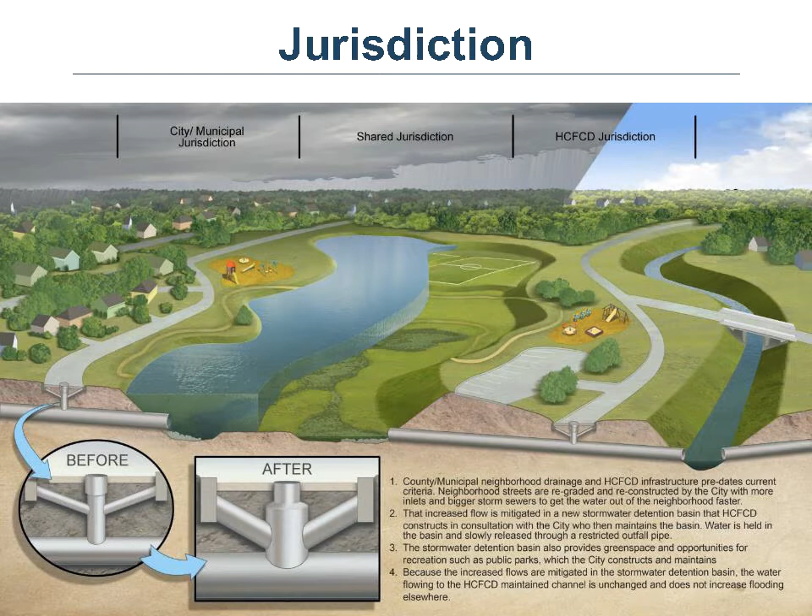Now, where flood control doesn't and can't build recreation, we routinely work with sponsors such as Harris County Precinct 3 or MUD or the City of Houston if we happen to be in that area, and to say, hey, look, we're going to build this green space for a detention basin, but 9 times out of 10, most of the year, it's going to be dry. Do you want to do something? Maybe put a ballpark in the bottom or put some trails around the top of it. And so that's where we get this idea of shared jurisdiction.

So that brings us to the projects that we developed through what I like to call our summer roadshow last year. One of those meetings was actually right here in this facility. I hope that some of y'all had the opportunity to join us in that. And what came out of that was a list of 237 projects that we included on our $2.5 billion bond election. The promise to the voters is that we would take that $2.5 billion and do our best to leverage federal opportunities to build as much as $5 billion worth of projects.

But what I'd like to point out, and this is where I like to indicate some of the proof in the pudding, why we're out here talking with y'all tonight, is that you'll see that 38 of those projects out of 237 were a direct result of the community input. These were ideas from the community that said, we think y'all should look at this, and we said, you're right, we should. And so we added that to the list.

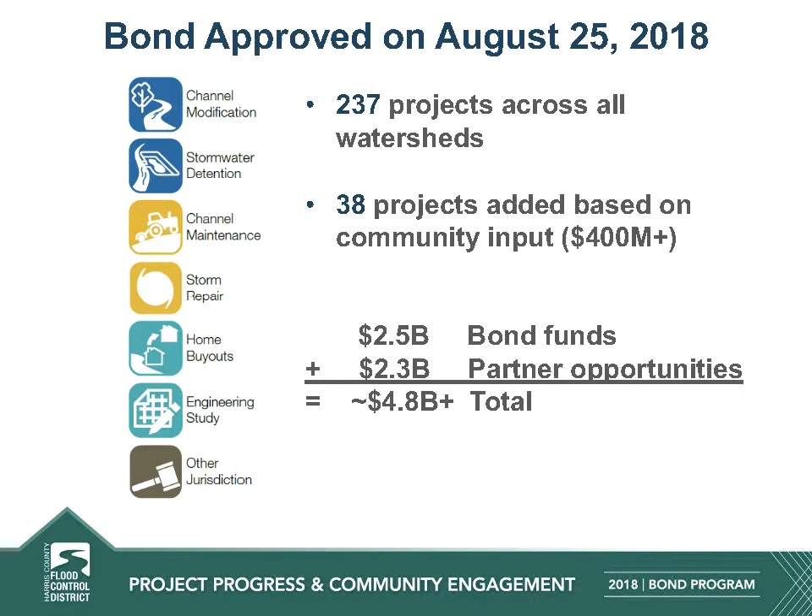I'm not going to go into much detail. I've already exposed my staff to an hour and a half's dissertation on what it takes to go through these programs. Instead, you guys look really nice. We'll move on to the next slide right after I at least highlight who those federal agencies are. These are the ones that we work with to try and access as much federal funding as we can. So over on the left is, of course, Harris County. Your property taxes pay for our $120 million a year appropriation.

But then we have our great partners with the United States Army Corps of Engineers, some of which are here tonight. Again, that was one of the original purposes that Flood Control District was formed, and so we work with them, and right now our partners on Hunting Bayou, Clear Creek, Brays Bayou, and White Oak Bayou federal programs. Those projects have been in the works now for really decades.

Then we move on to the United States Department of Agriculture. Who knew? The NRCS. They're one of the primary funding partners of ours for making repairs to our channels after a disaster. After Hurricane Harvey, they are behind $80 million worth of repairs that we're making right now all across the county to our infrastructure. Yes, it's depressing to think that 2 years after the fact, we're just now getting those repair projects out, but that's an indicator of the pace at which federal funds have been known to flow.

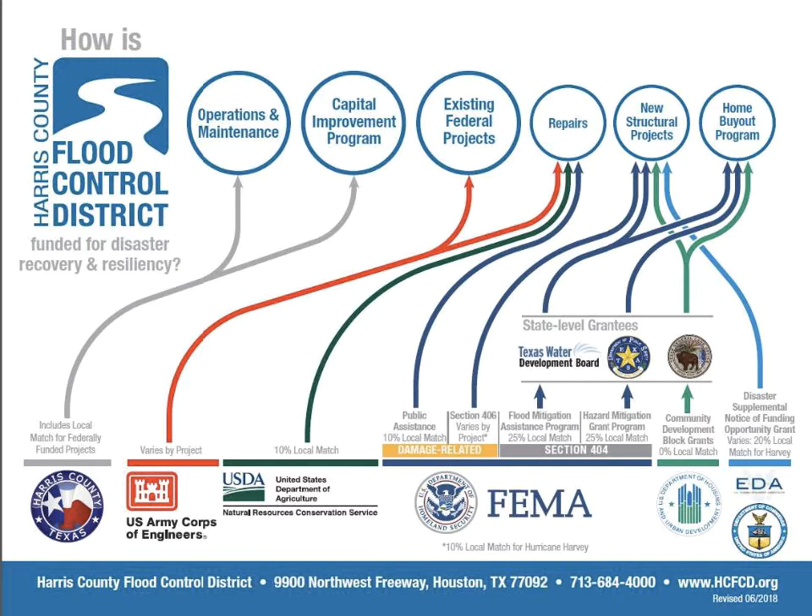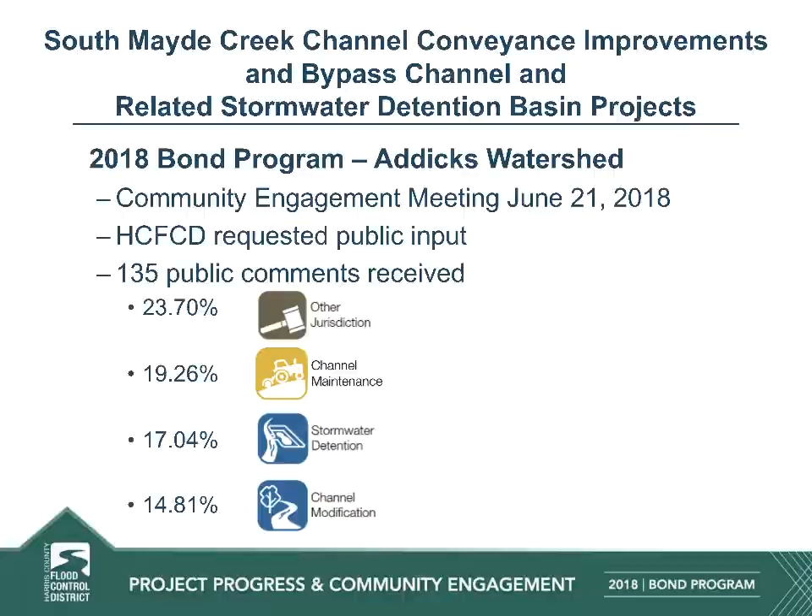What's important to us, of course, is our original mission to build flood damage reduction projects that work with appropriate regard for community and natural values. So with that, I'd like to turn the microphone over to our next presenter, and it's Jonathan St. Romain. Jonathan is a project manager at Harris County Flood Control District, and he'll be talking about these projects that we've been looking at. Thanks for your time.

Thank you, Alan. As Alan mentioned, my name is Jonathan St. Romain. I'm the flood control project manager for these two projects we're going to go over tonight. And so we'll go over the full outline of our first project and then head into the second one. So the first project we're going to go through, it's kind of a mouthful because it's got a lot going on. It has two main components to it, channel improvements and bypass channel for South Mayde Creek.

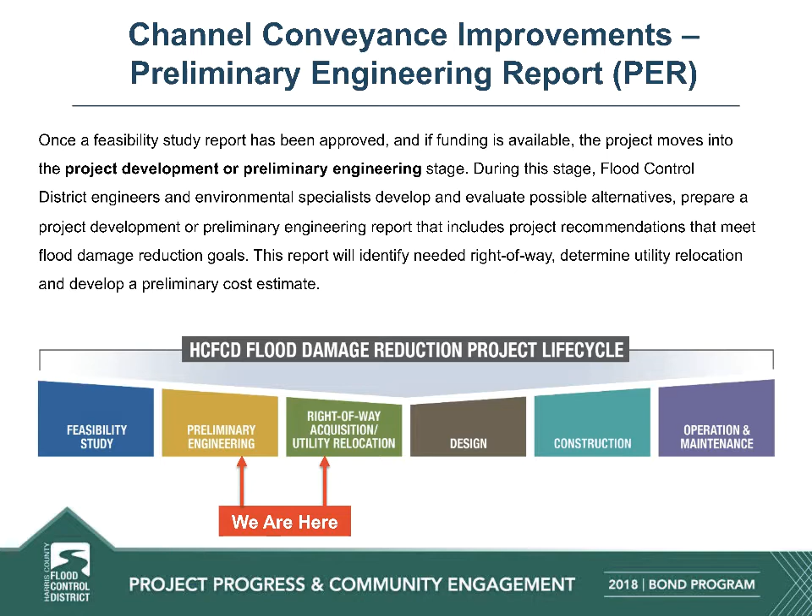So PER, what is a PER? Why do we have to do this? Why do we have to do all these studies? Why can't we just get out there and dig? Well, there's a lot of details that we have to figure out before we can really even enter our final design process. And so some of those steps include surveying. In order to do our final design, we've got to get a nice detailed survey, the whole lay of the land, both up on the surface for topographic survey, but also this next line here is utilities and pipelines. We've got to figure out what's in our way. Are there pipelines in the way? Utility crossings, who owns them?

What are those constraints? Geotechnical, what's underneath the surface? We need a detailed geotechnical investigation so that when we dig, we know what we're going to run into. When we go into final design, what can our slopes be? What's going to happen with sand or silt or clay, and how does that impact our final design? Environmental, lots of environmental concerns on this, and we'll get into that a little bit later, but we have to follow federal law when it comes to not only wetlands but also stream bottoms. And so there's extensive environmental studies that we do as part of this PER phase.

And then maybe even kind of the meat of all this is our hydraulics and hydrologic modeling that we do. So we take all this information and we build these, we call them H&H models, hydraulics and hydrology. We build these models, build these channels, existing and proposed, and see how they benefit the community, see what kind of water surface elevation reductions we can get from it, and look at all the different alternatives.

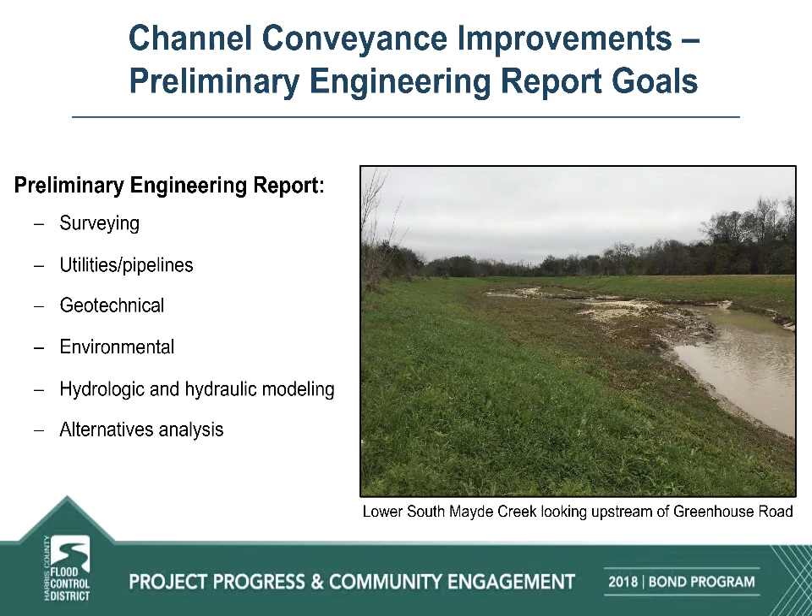As you get more and more into the details of these things, you've got to run these models because you find out there's lots of different ways to do things, and you want to come to the best conclusion and do the best option with taxpayer dollars and make sure that the facility you're building is going to be the most efficient.

So where are we? A little bit of a lay of the land and some existing conditions. So for our South Mayde Creek channel improvements and bypass channel, we can kind of point to some features here. Right through the middle, we have Greenhouse Road, runs north to south, and we're looking at the section of South Mayde Creek that comes from Barker Cypress all the way up to about Fry Road. And everything that's east or downstream of Greenhouse Road in this box, you can kind of see, that's U.S. Army Corps of Engineers property.

That's Addicks Reservoir. What? A little louder. A little louder? Just to make sure.

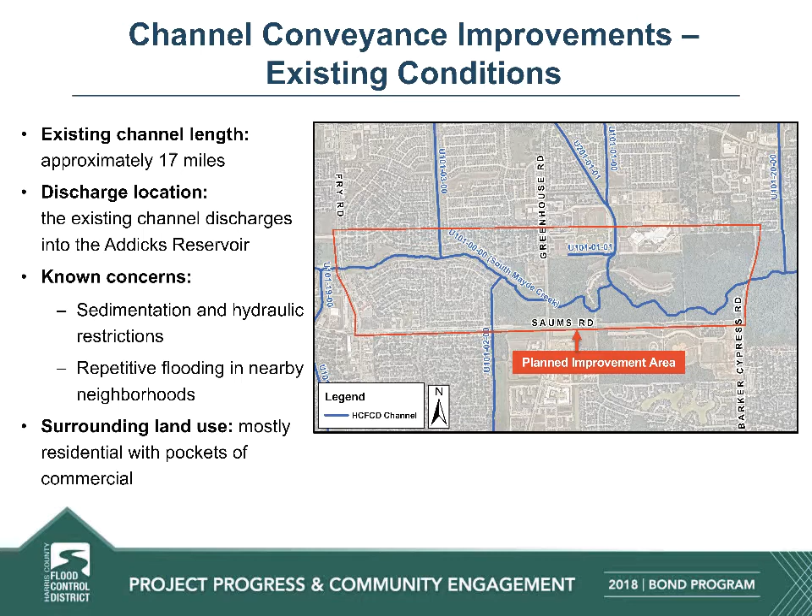Yeah. Addicks Reservoir is in here, and then upstream of Greenhouse Road, we have South Mayde Creek that comes all the way to Fry Road, and that's our project area for the channel improvements and bypass channel. Now again, down here I mentioned this is Addicks Reservoir. That's U.S. Army Corps of Engineers property. So there's additional permits that we have to go through.

And so we've had some constant coordination with the U.S. Army Corps of Engineers. Lots of back and forth in determining what's going to be involved with those permits because it is their land. And for us to look at doing a project on federal property, that just means that we've got to coordinate with them, and they're going to have requirements for us.

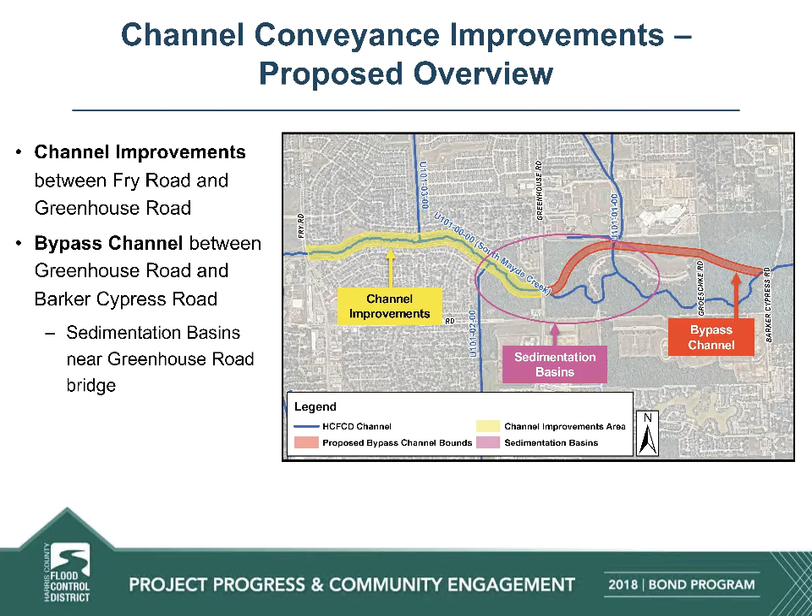So we know a little bit about the existing conditions in this area. We know we've had home flooding from recent storms. Another main issue is mobility. We know that oftentimes, even if homes aren't flooded, we have some mobility issues with some of our intense storm events. And then another condition that we run into is some sedimentation that we know is happening downstream of this area. And so we'll talk about that a little later.

So what is this project? What are we looking at doing? The overview here shows you, to get your lay of the land again, Greenhouse Road right here in the middle. To the west, or upstream of Greenhouse Road along the creek, that's where we're looking at doing channel improvements. And next slide, we'll go into a little more detail about that. The bypass channel, we're looking at taking downstream from Greenhouse Road, downstream or east into the Addicks Reservoir.

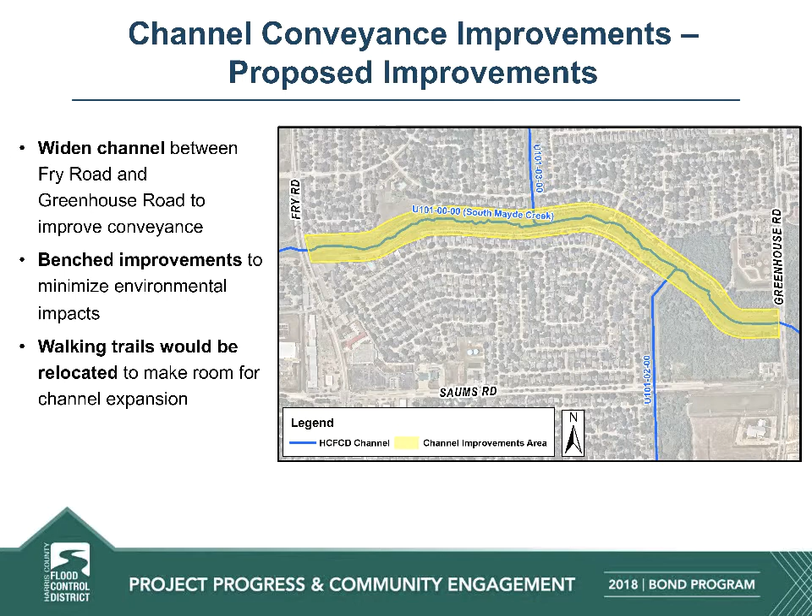And then a third component that we have that's kind of a new component after some coordination with the Corps is sedimentation basins that we're looking at putting in this area.

So the channel improvements. What does that mean when we say channel improvements or channel conveyance improvements? Well, really to put it simply, it means widening. In this area, South Mayde Creek, between Greenhouse Road and Fry Road, we've got 300 feet of existing Harris County Flood Control District right-of-way. That's a good thing. We can do channel widening in this area without going after additional right-of-way. And another note here is that there are walking trails that exist up on the tops of the side slopes, and those may be impacted, and so we would have to look at how those could get moved or replaced.

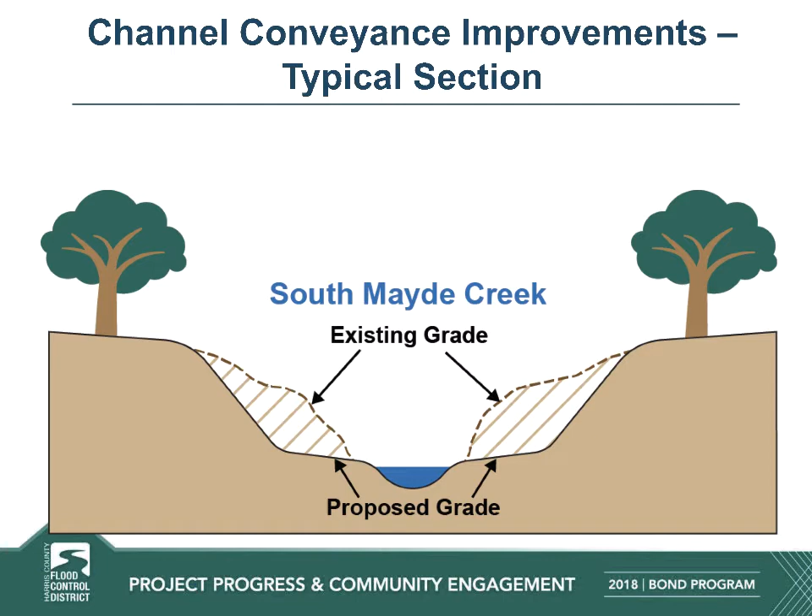So moving on to the next component of our bypass channel. Now we're looking at east or downstream of Greenhouse Road, and we're proposing a bypass channel that connects into South Mayde Creek here, comes through the reservoir, and then connects back in just before Barker Cypress. And we're looking at a number of different options with this.

Now, with all the options that we're looking at, there's a number of constraints and challenges that we've got to work through. And so that kind of gets back to what is a PER? Why do we do this PER? Well, we've got to work through some of these challenges.

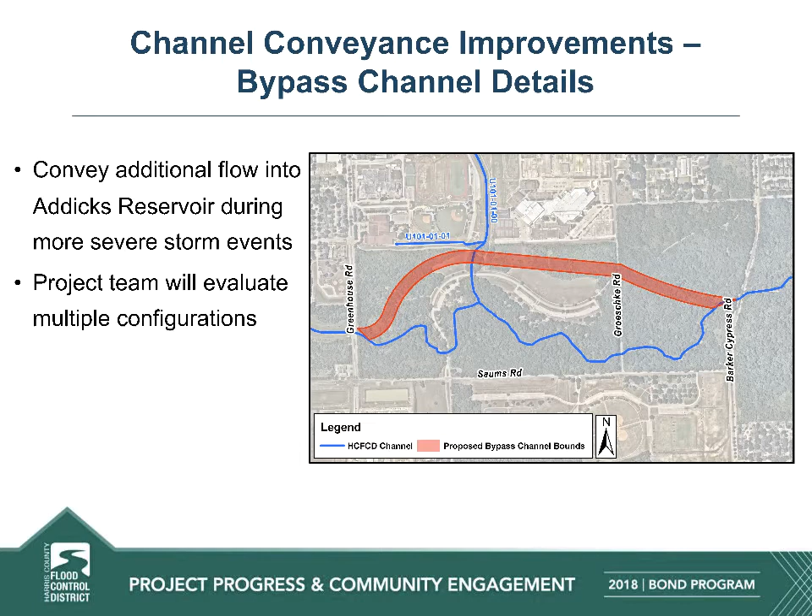What are these challenges? First is we're proposing a bypass channel that connects here and connects back downstream in South Mayde Creek, but there's a tributary that comes in from the north right here. Well, what do we do with that? Where does that tributary connect in? What's the elevation of our bypass channel going to be compared to the elevation of that tributary? If it's too high or if it's too low, how do we connect that in?

What are the water rights? Can we intercept that tributary and just take it east through the bypass, or are there water rights issues to where we've got to make sure it keeps on going where it goes today?

I mentioned these connections here. There's a couple different things to look at. Exactly where, at what elevation do we connect this bypass in to South Mayde Creek? We can connect it in at the very bottom of the channel, and then all flows would go around the bypass, or we can come in a little higher and only the higher flows would hit that bypass and come around. There's also considerable environmental issues with those options, as there's lots of rules regarding stream beds and impacting those stream beds from an environmental standpoint.

We've also got this proposed bypass channel crossing a road, and so we've got to look at what happens to this road crossing here. Do we build a bridge? Do we put in culverts? What does that do to us hydraulically with our hydraulic models? What's the cost of putting in a bridge? Who would do that?

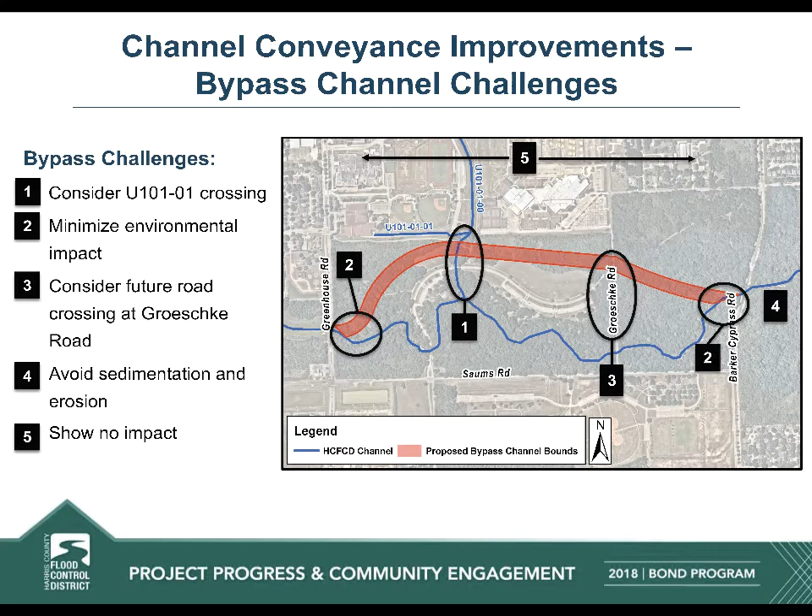I mentioned sedimentation basins, and that was something that's come up with coordination with the U.S. Army Corps of Engineers for the permit that we would have to get to do a construction project on their property. We would have to show that we're not bringing more sediment into the Addicks Reservoir, and that's a good thing, and we agree, and that's not something that we want to do, is build a project that's then just going to dump more sediment into the reservoir.

And so now we've added a component to this project to look at sedimentation basins. And so again, more models that we need to run to figure out how do we build the basins, where can they be, how does water get into them to slow the water down enough to where sediment can fall out. We've got to be able to maintain these basins. We've got to be able to scoop the sediment out and haul it away. So all of those things are part of what we're looking at.

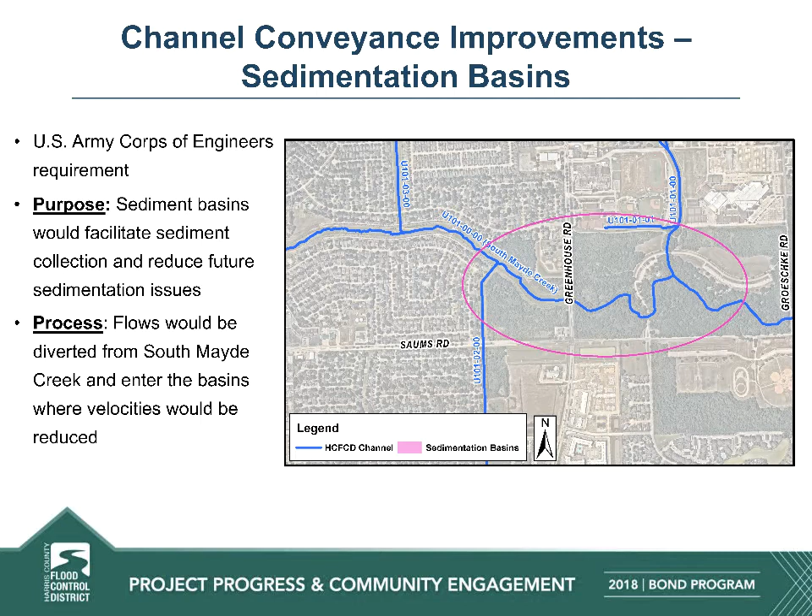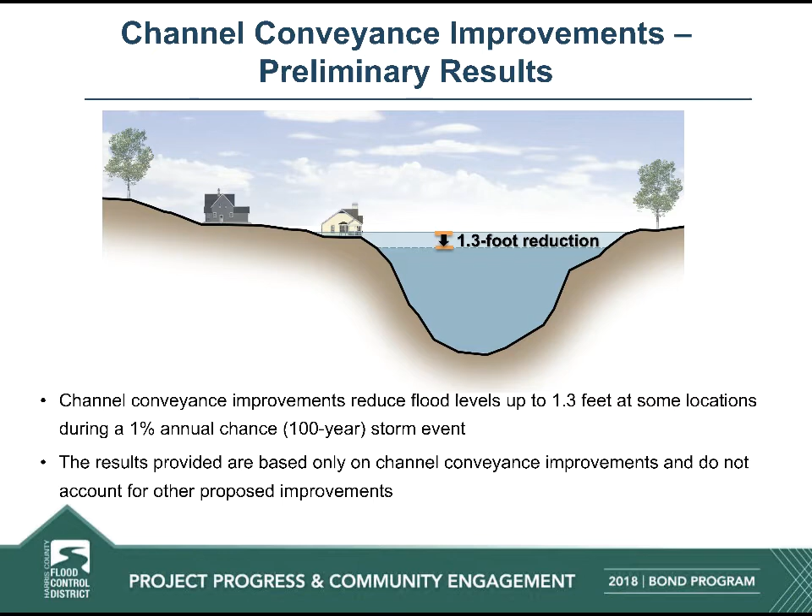So what are the results? After looking at all of these issues, what conclusion can we come to in terms of benefit for the community? Well, we think with the channel improvements alone, we can get up to 1.3 feet of peak water surface elevation reduction, and that's in the vicinity of neighborhoods between Greenhouse Road and Fry Road. And we're still working through the modeling on the rest of the components, but we can share with you now we've got about 1.3 feet of benefit, and that's peak water surface elevation reduction from the channel improvements component of the project.

Where are we in the timing of all of this? Well, for the rest of this year, we're right in the middle of what we're doing tonight, gathering public input, working through the remaining challenges and continuing our modeling. And then spring of 2020, we hope to get this preliminary engineering report finalized, and then move into detailed design following that. And all through this process, as we get through these next steps, we would have communication with the communities as well through various formats.

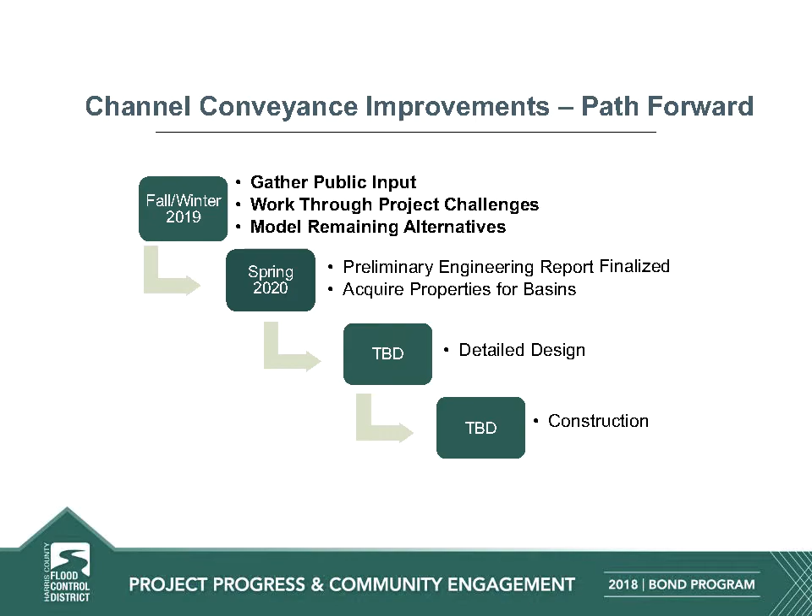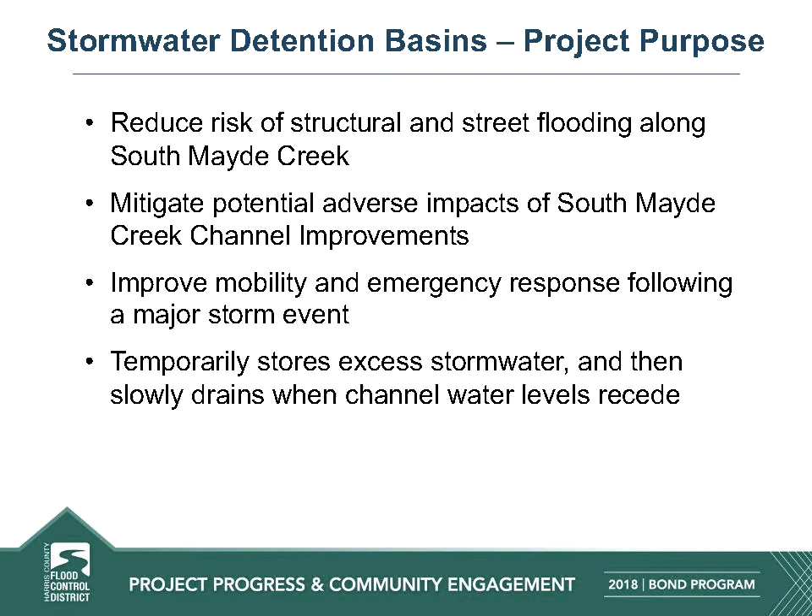So I mentioned at the beginning, we've got 2 projects that we're looking at tonight. The second is stormwater detention basins on South Mayde Creek. So the first, we really dealt with channels and the movement of water, the channel improvements and the bypass channel. This project, it's a separate project, and it's looking at regional detention basins. So of course our purpose and our goals here are to reduce the risk of structural flooding. Potentially these basins could mitigate for the earlier project we just talked about, the channel improvements and bypass. We'd like to improve mobility, as I mentioned before, and in these detention basins, the aim is to temporarily store excess water.

What could these basins look like? We've got a couple of different options that you'll see all over Harris County, either flood control regional basins or many municipal utility districts will have both wet and dry bottom detention basins. Got a couple of examples here where the dry bottom, you can see it's normally dry. The bottom of that basin has a slope on it so that water can kind of drain out and it can be mowed and maintained. A wet bottom basin that you see here, the static water level or the permanent pool is the bottom of the basin, and so that can actually be flat. And because the bottom of that basin is flat, we can actually get some more volume if we have a wet bottom detention basin. We can also incorporate some nice environmental features, some native plantings and things like that.

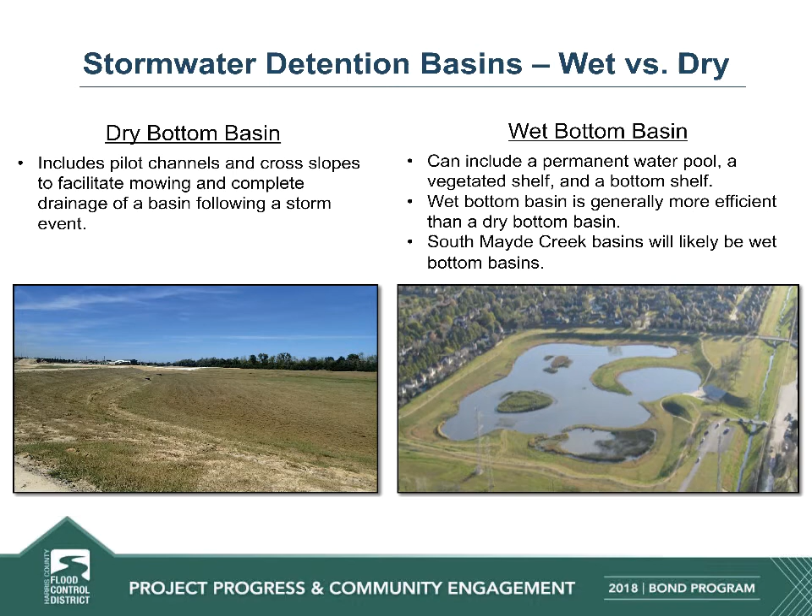Where are we looking? Well, I mentioned at the very beginning when we went over what is a PER, what steps do we have to go through. You remember that green icon was highlighted, and that's right-of-way acquisition. So we've got a nice generic oval through the region because we're looking at a couple of 60-acre or so properties that are open land right now that flood control does not own right now. So like I said, we've got this generic oval, but these two properties are in this area, and so that's where we're looking at them to be located.

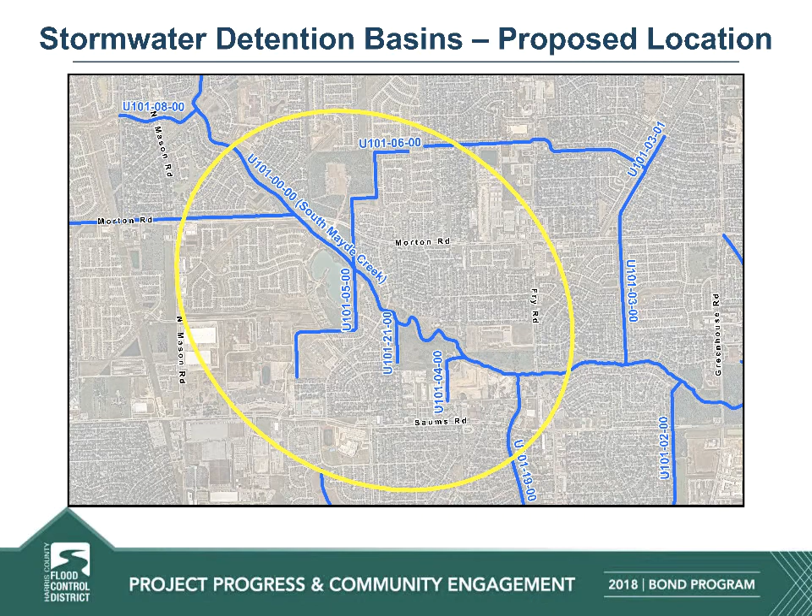These two basins, as we've gone through some of the modeling, we've determined that in what will be the western basin, we can get about 404 acre feet of storage. That's stormwater storage. In the east basin, almost 600 acre feet. But what's an acre foot? We talk about acre feet a lot. Well, look at a football field, and you get 272 feet down the football field. Not quite all the way. You get into the red zone, and then you go a foot high, and then you have the 160 foot wide. That gives you 1 acre foot. And so you can kind of imagine that these basins are hundreds of acre feet, which is a good amount of storage. And you can see the gallons number here, 131 million and 188 million gallons.

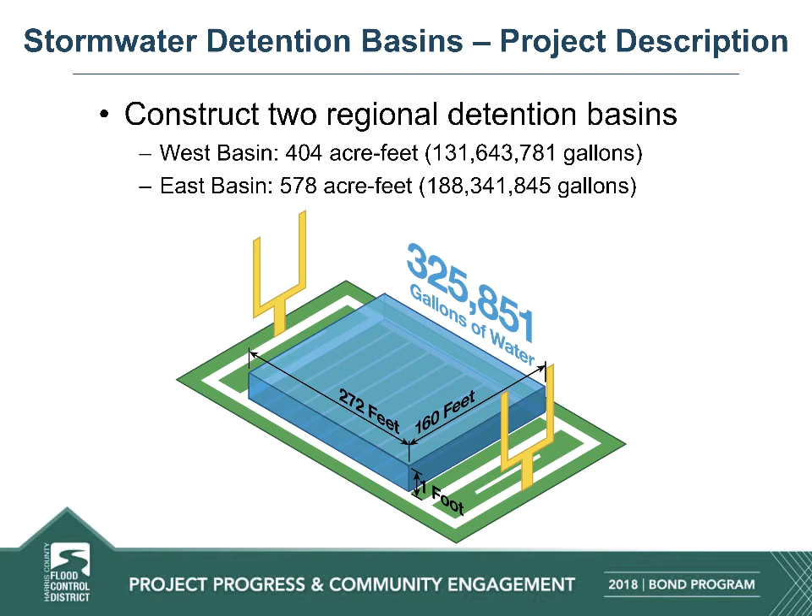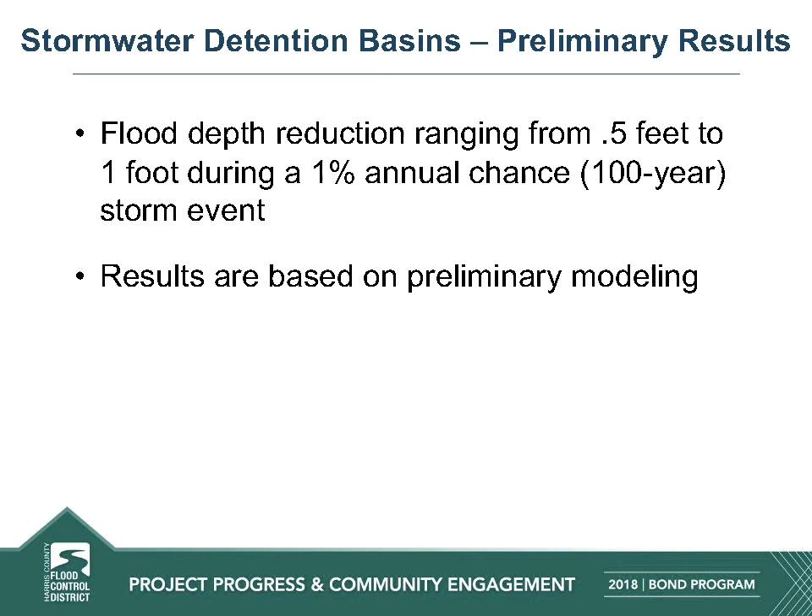What are some preliminary results from looking at this? Like I said, we're at the early stages of our PER, preliminary engineering report here, but we're looking at about another half a foot to possibly a foot of peak water surface elevation reduction from a 100-year event.

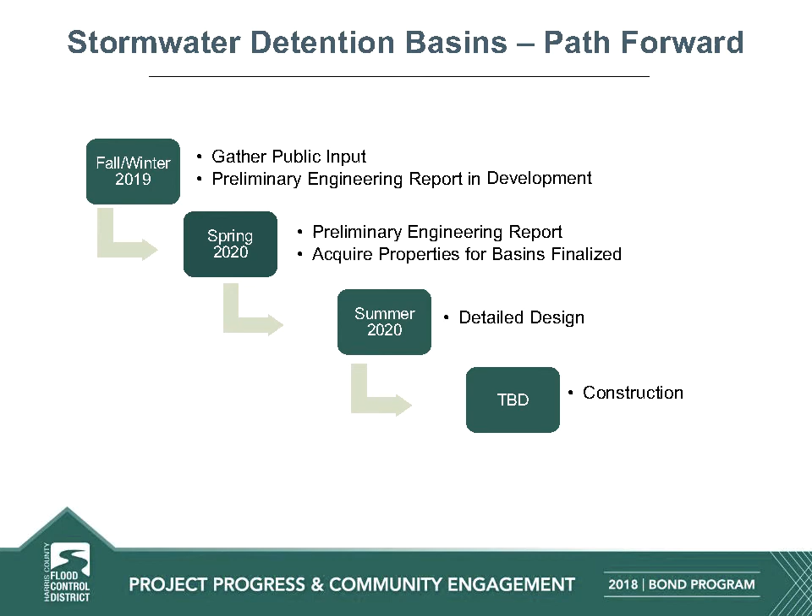Where are we in this project? Well, again, for the rest of this year, we'll continue our report and our studies and gathering public input, and then that would put us moving down into detailed design by the summer of 2020, and then of course all of this is pending the right-of-way acquisition.

So, after everything I've talked about, us doing preliminary engineering reports, these are projects that we have that are maybe in the future for construction. We'll shift gears and go over a couple things that are happening right now. And so the things happening now are not necessarily related to projects that we've just gone over tonight, but if you see construction, traffic, and equipment going up and down the area, they're probably related to these things that are going on.

And we recently completed a desnag effort, I think down in the Addicks Reservoir along the creek, and so we worked with the Corps on getting some folks in there to pull some trees and blockages out of that. So I think that's recently completed.

Active right now is a repair effort, and that's on South Mayde Creek from Greenhouse Road up to Fry. I think it's up from Fry Road upstream of there to the west, and so that's repairing if there's damaged outfalls, any erosion repairs and sedimentation. Those are the types of things those crews will be doing.

And then brand new or hot off the shelf is our desilt project that we just bid back in October, and that's a desiltation effort in the bottom of the creek to remove that sediment, and that is set to begin at the end of this year. So you can look forward to those projects.

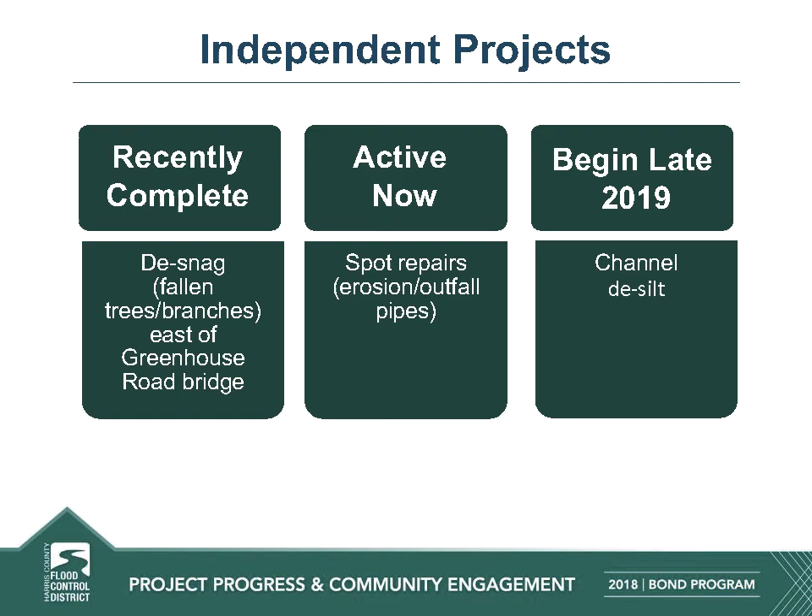We'll break out into the open house portion in a second. If you have questions on those projects going on now, you can find, I will point to him, Matt Lopez in the back. And I think they'll be over there by our service requests table. So with that, we want to hear from you, and you can visit our website for the 2 projects that I talked about, hcfcd.org/C36 and C46. And I will turn this over to Herman.